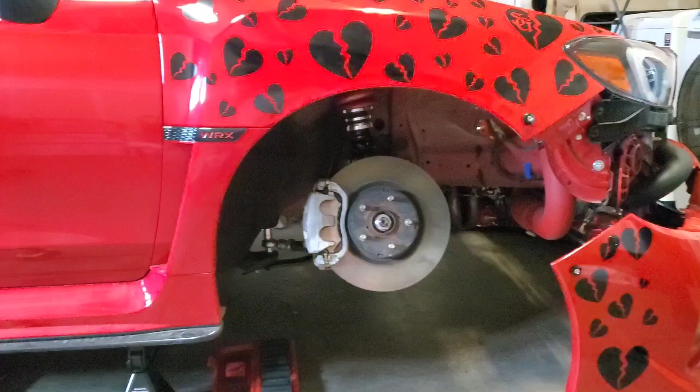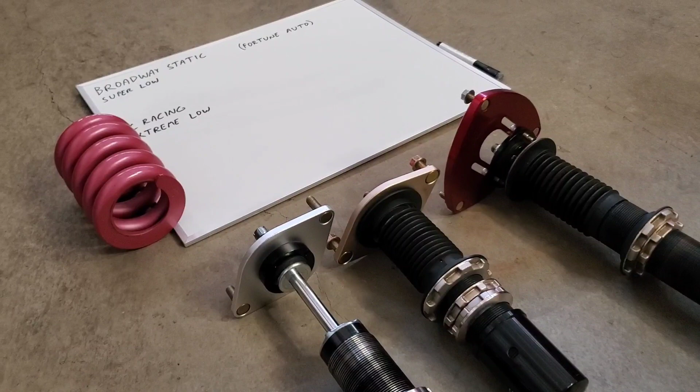So this is probably going to be a multi-video series. I'm actually getting ready to rebuild these Broadway Static coilovers. I'm going to be upgrading a few of the parts on it, so I'm going to be showing you guys that. And then I got my buddy's BC Extreme Lows over here, so we're just going to compare the two, and hopefully this video will help you make your coilover selection and avoid some of the common mistakes that happen when it comes to buying coilovers for your car.

Just to reiterate, this is going to be strictly from a stance/riding low aspect. So this is all going to be for making your car as low as possible and the things to consider, versus going over the pros and cons of a performance coilover.

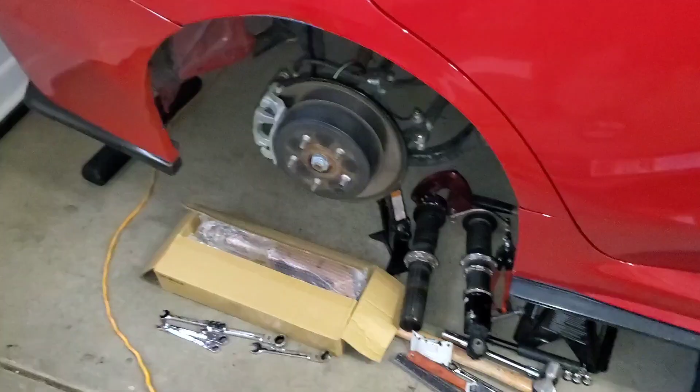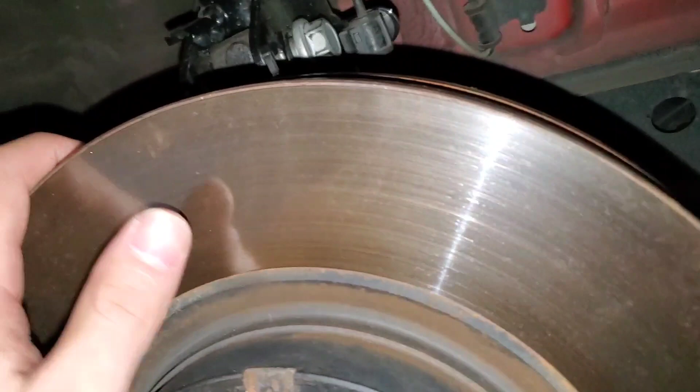Taking off the rear coilovers is a relatively straightforward and easy process. I just wanted to take this time to show you guys how to properly take off the front coilover, because this is where the most mistakes happen, and this is going to help you out, especially if you're working on your car alone because you have no friends.

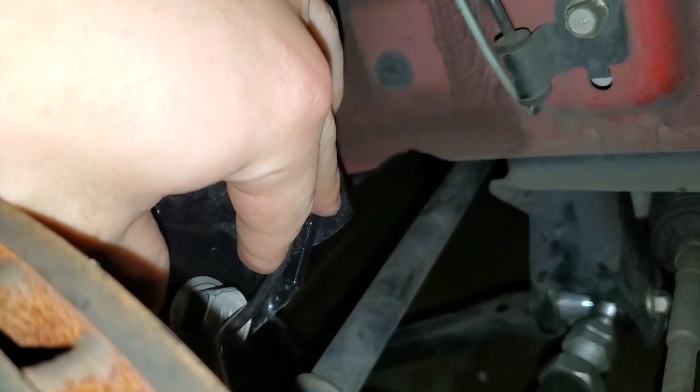So the most common mistake when taking off the front coilovers is they'll actually drop this entire coilover assembly right onto the axle boot, and when you do that you have potential of ripping or damaging the axle boot, and when that happens it's just going to be a huge mess of grease. Every time you drive the car, the axle is going to spin and sling grease everywhere, and once you lose all that grease packing that's inside that boot, that axle is going to fail sooner rather than later.

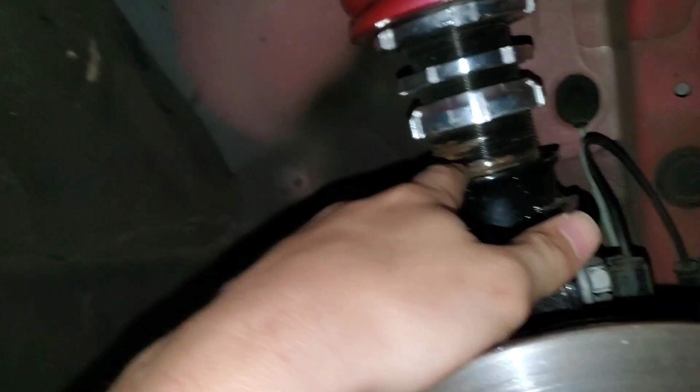And if you plan on taking your coilover off to adjust it, this would be the best time to break these collars loose while this entire assembly is on the car. What you can do is actually lock the steering wheel in place, so when you apply torque to these collars to break them loose, the coilover is not going to spin, and then you can just go to town with your spanner wrench.

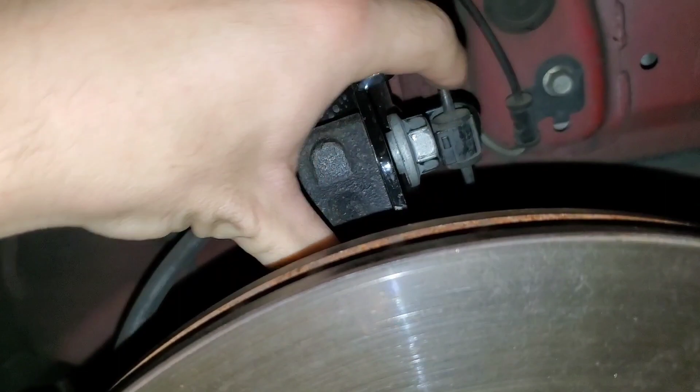So before we do anything else, we're going to remove this brake line here. We're going to remove the ABS sensor. We're going to remove the nuts for these bolts. And I like to keep one bolt in to hold the suspension assembly up before the next step.

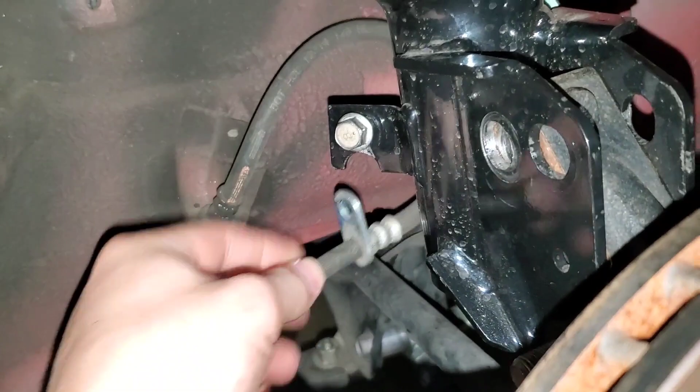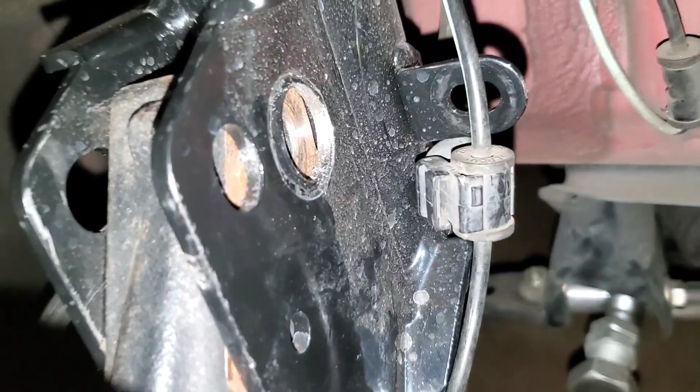Alright, so we removed our brake line. I like to put the bolt back in the bracket just so we don't lose it later. We got one bolt taken out here, one bolt holding the entire suspension assembly up, and the ABS sensor is removed. Now what I like to do is stick a jack underneath and apply some pressure underneath the lower control arm.

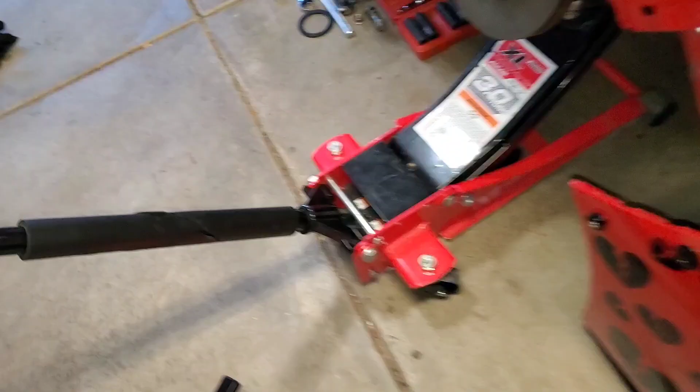So that when we go to take out these strut tower nuts, this entire suspension assembly is not going to drop. Alright, we got our jack putting some pressure on the lower control arm there. Now we can go ahead and take these nuts completely off, and we don't have to worry about this suspension assembly dropping until we lower the jack.

Now we have our nuts removed, so we can go ahead and lower this jack and support the coilover while we're doing so. Take out that final bolt, and then we'll have the coilover out.

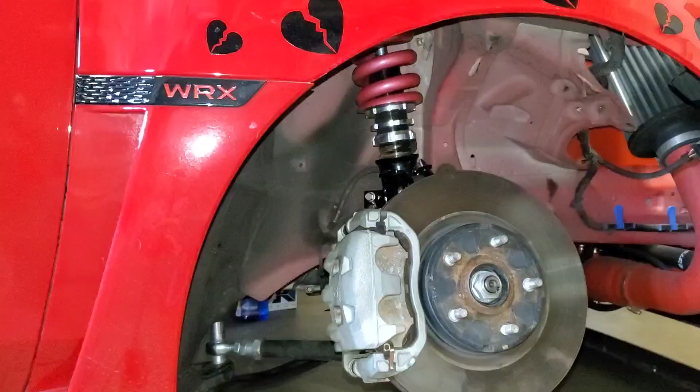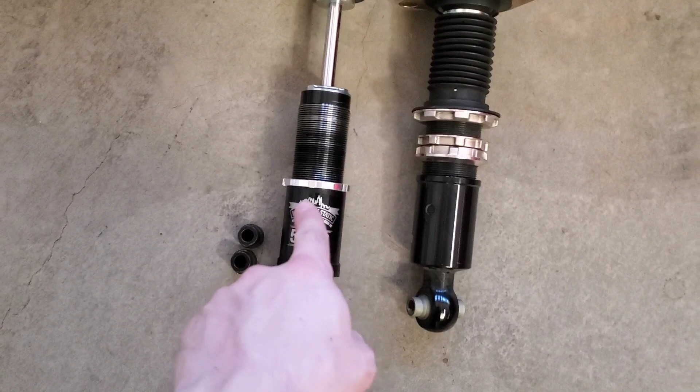Now we have our coilovers side by side. We got Broadway Static Super Low on the left, BC Extreme Low on the right. Those are the rears, and then we got the same going here for the front. Obviously some of the springs and components are taken off the coilovers right now, but we can ignore that for now.

So if you ask me, Alex, which coilovers should I get to make sure I can get my car low enough, make sure I can make it slammed, whatever you're trying to do, these are the two coilovers I always recommend.

So BC is the cheaper option of the two. Unfortunately, these are kind of mass produced. They use more components from Taiwan and China, but Broadway Static is actually a sister company of Fortune Auto, and these are all US made parts, US assembled. You also have a few things from Japan in there as well, like the radial bearings, but this is going to be an all-around better quality coilover. It's obviously going to be more expensive, and the real technology you're paying for is actually all internal to the strut itself.

Just for a size comparison, the rears on the BCs are maybe an inch shorter than the Broadways, but the fronts are virtually the exact same length.

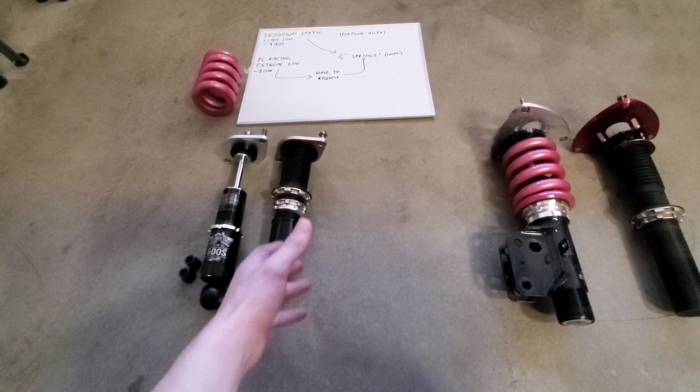Alright, so now we figured out that we want the low versions of these coilovers, right? We don't want the regular BCBRs, and we don't want the regular Broadway Statics, because those are just going to be longer strut bodies, and those are not going to be able to let you go as low as you want to go.

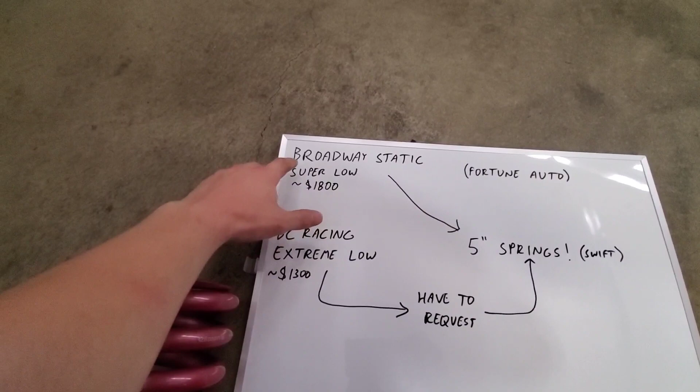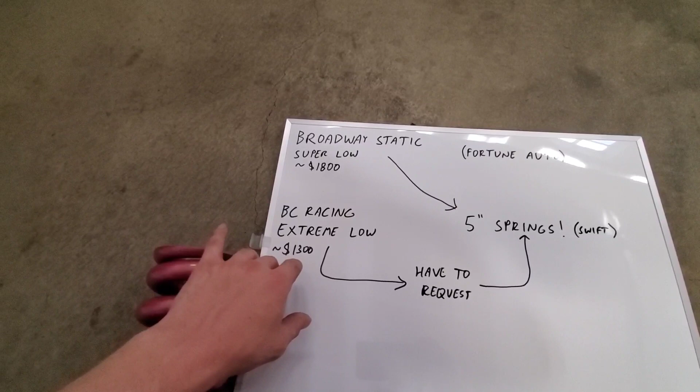So we come over to our chart here, and we have the Broadway Static Super Lows, which usually go for around $1,800 with a premium spring upgrade, which is going to include a brand like Swift. And then you have the BC Racing Extreme Lows for $1,300, but you're going to have to request this specific spring length—you're gonna want 5-inch springs in order to go low enough.

This is just a note to remind you that Broadway and Fortune Auto are sister companies. And the reason you want 5-inch springs is so that you can thread these lower mounts up and use their maximum potential in order to go low.

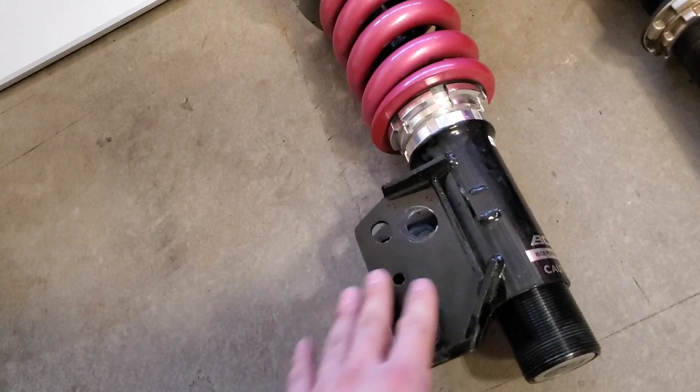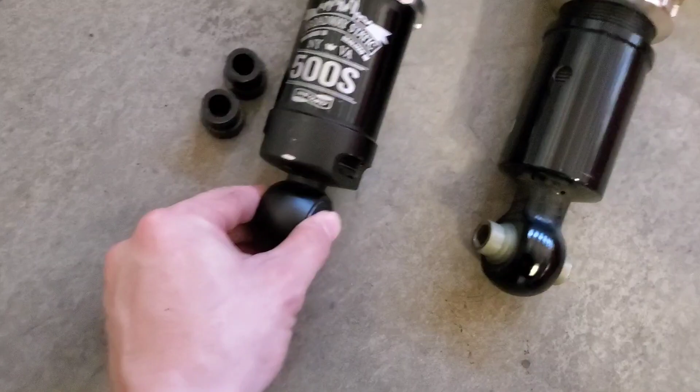So if you have a 6 or 7-inch spring, something super long sitting on top here, what's going to happen is you're going to thread this lower mount up to go lower. You're going to run into the spring and the car is still not going to be low enough. Same thing goes for these. Now the strut can't pass through the bottom of these mounts. This is more of a cup mount, so once it bottoms out in the cup, you can't go any lower. But if the spring is too long, you won't even be able to go to the bottom of this cup before you run into the spring.

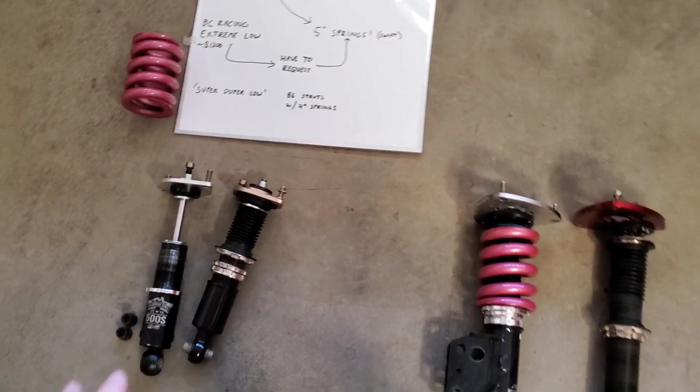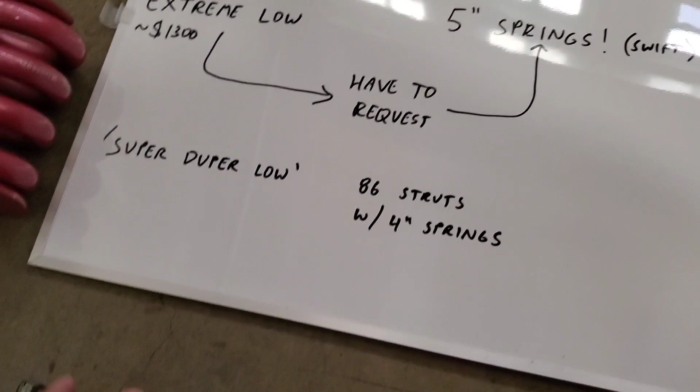Now the last thing I wanted to say before I finish up this video is you can actually get something I like to nickname the Super Duper Low, which is actually GT86 chassis struts with 4-inch springs. So these coilovers are even shorter than these, and they allow you to go super low with your car, and that's going to be good for guys that want to be slammed but don't want to run a lot of camber. That's the kind of setup you're going to want to go for.

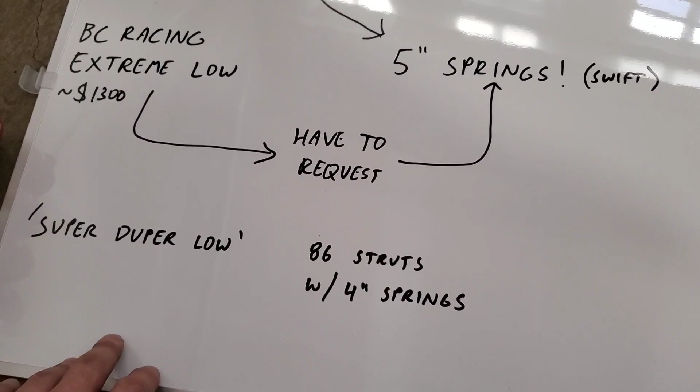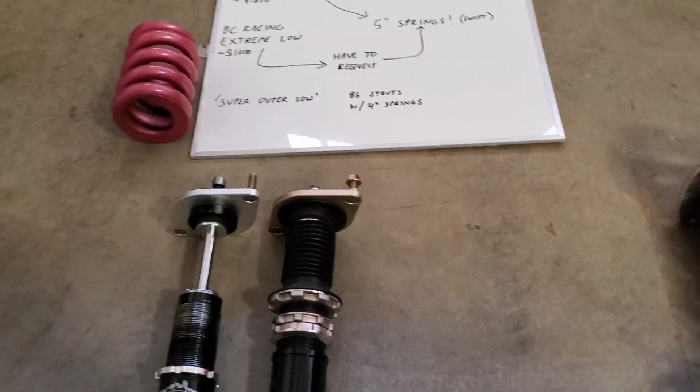Just a disclaimer, these probably won't go low enough with the stock LCA. You're going to want to utilize a drop LCA or something with these, unless you're running a lot of camber. And in order to go lower, there are a few different methods, so I'm going to go over that in future videos. So basically, if you want these super duper low struts, all you have to do is specify that you want an 86 strut body, but you want to utilize the top hats and the lower mounts in the front for the VA chassis, because those cars are in fact slightly different when it comes to the dimensions on the mounts and top hats.

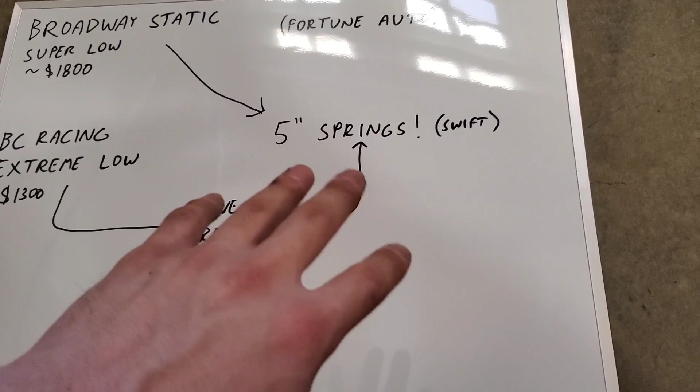So that is the basics of spring length. I just wanted to remind you that you should always upgrade to a premium spring such as Swift. These springs are going to last a lot longer. They're made of a more superior material. Obviously, they're going to be a little bit more expensive, but for springs, you should never skimp out on quality.